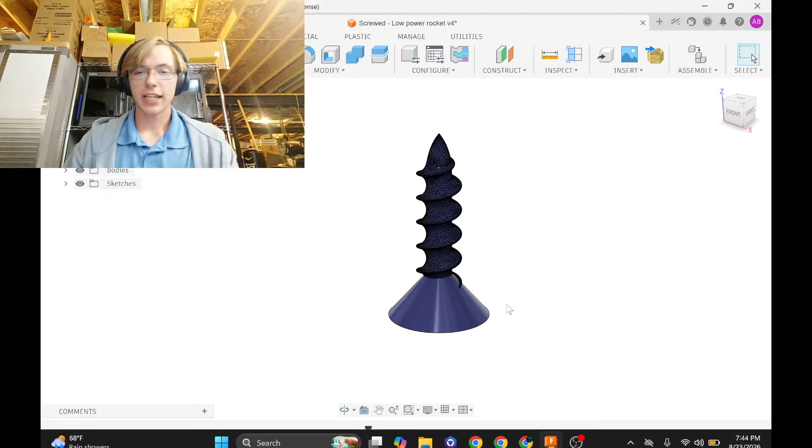But yeah, so today we're going to be working on this. It's a screw. I don't know if you can tell that or not, but basically I got the idea: what if we just take a model of a Phillips head screw, scale it up and make it out of TPU, which, if you don't know what TPU is, I don't have any right next...

Oh, I do. So this is a dice that I 3D printed out of TPU filament. And so it's squishy, right? TPU is a very squishy filament, so you can make flexible things out of it. And that's cool for rockets because if it smashes into the ground, it'll just flex and deform but then spring back like a spring. So it won't damage the rocket at all, and it won't damage what it hits. So you could fly it on concrete and it would most likely be fine. I would obviously have to test it, but most likely it would be fine.

Turn off this so there's no fire. But yeah, so it would work great.

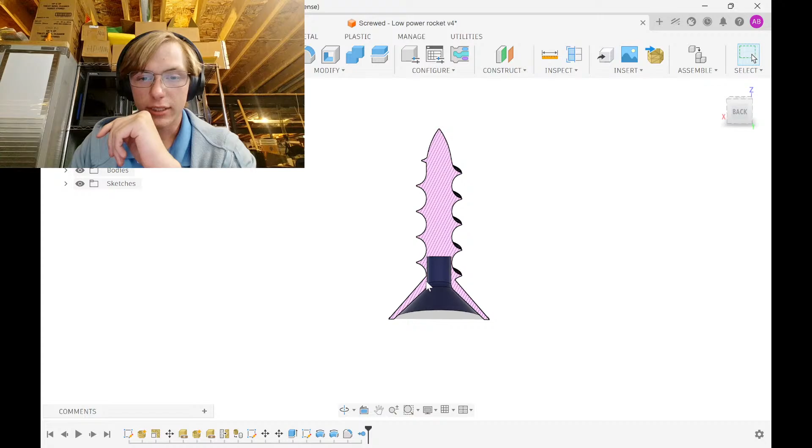That said, we have to design it, and there's a few constraints and issues with this. I was originally thinking to do a cluster of 4 motors. A Phillips head screw has, oh, you can't see that. Hold on. A Phillips head screw has here, here, here, and here. So if you put a motor in each end of that, you can have a 4-motor cluster. Unfortunately, because of the chamfer, there's not enough space for a motor. So I'm just putting one motor down the center. And even still, there's not a ton of room because I decided to go with one 24mm motor.

And basically, this is all I have right now. I've got the screw model itself. And then I modeled this geometry as best I could in OpenRocket and figured out what size flange we need to make it stable. So I did that, and then I've started on this. Essentially, it's going to be motor eject, meaning when it goes up, instead of the nose cone coming off, it's going to eject the motor out the back, and then a streamer will come out there.

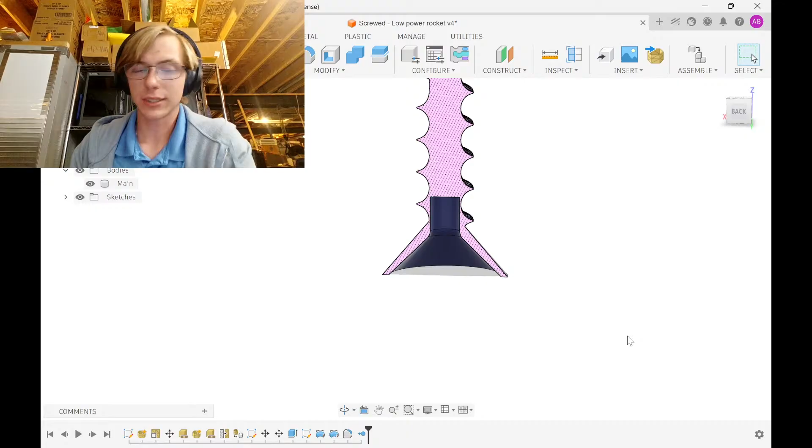The only reason I need it to eject at all is because I don't want it to come in ballistic, because if it's stable going up, it'll be stable coming down, right? So I have to make it so it doesn't come in ballistic and literally screw itself into the ground, because these spirals will make it spin so fast. In fact, I'm worried about it ripping itself apart from centrifugal force. We will have to see, but definitely it will be an interesting rocket, to say the least.

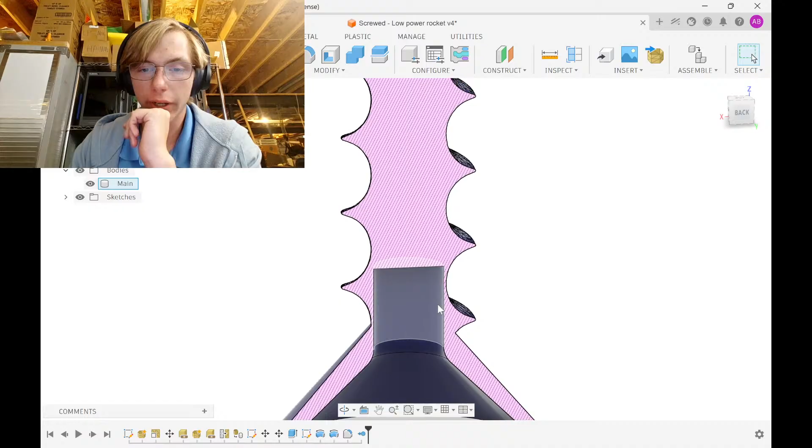But yeah, so we are going to make a screw rocket, if that makes any sense. So what I'm going to do next is I need to figure out if this, because this is about a 1.2 millimeter tolerance, which is 3 layers on a 0.4 millimeter nozzle, which is pretty strong, but I don't know if that'll be strong enough. So I need to make the housing for the motor itself, and then we can move from there.

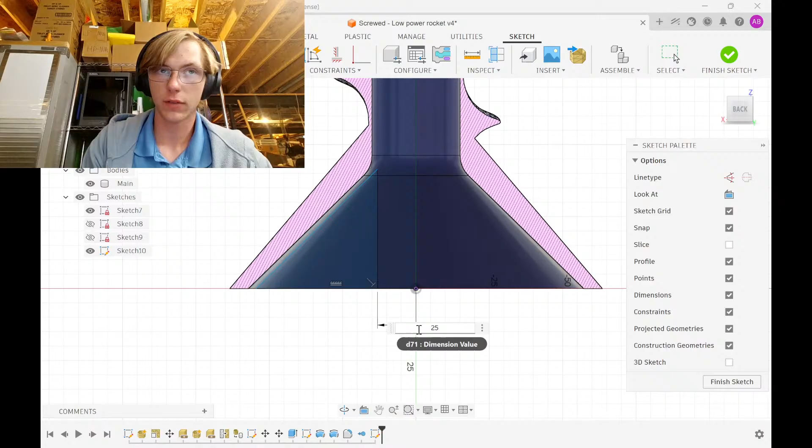The only thing I don't know, because I could make a new sketch right here. Turn this sketch on, and then we do line here, here, here. Then the inside diameter of a 24 millimeter, or the outside diameter of a BT50. 24.8 millimeters, so to add tolerance, we'll do 25 mil. Oh, but it's revolved, which means we need half of that for the radius, which is 12.5.

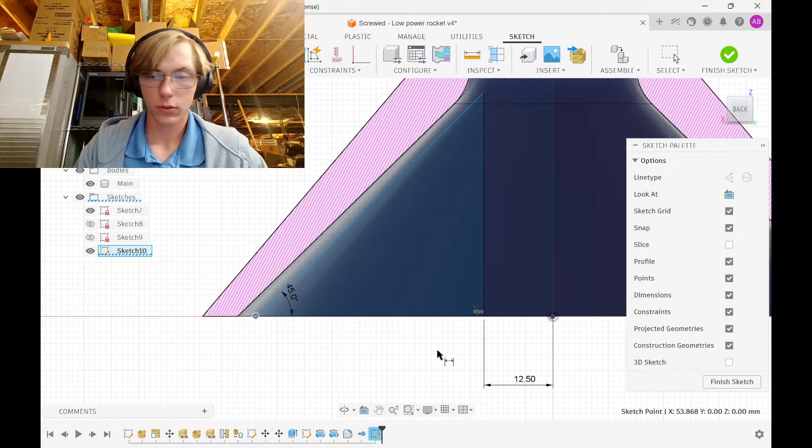And then we want this overall radius, this number to be 45 degrees, and then the total width of it should be 2.25 inch. So that's the total width of that. So inspect from this corner to this corner. Inspect here to here. We got 57.15 millimeters. 57.15 millimeters. Perfect.

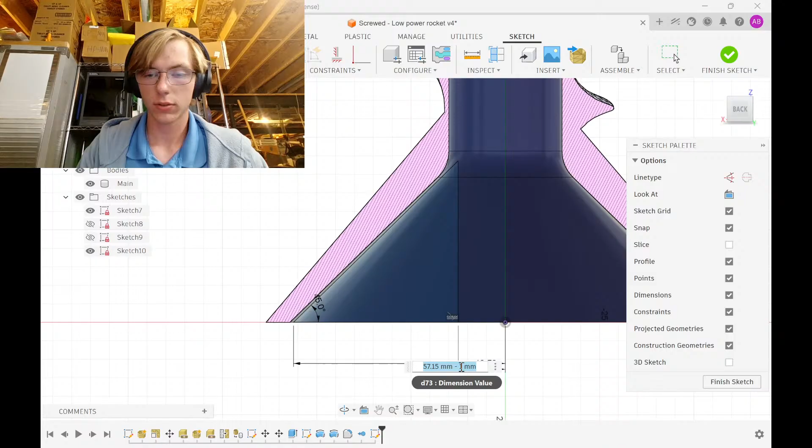Now we want to subtract probably 1 mil, so that there's a little bit of a tolerance gap there. We don't need that much though, actually. Actually no. We'll do 0.5, and then we do need it to have a bit of a collar. That way it actually stays in there in flight. So we will go line. Actually, what am I doing? I can just use the old sketch, revolve it around this axis, create a new body, hide the main body, fillet this to be 5, I believe it was. No, it was 10. Yeah, it was 10.

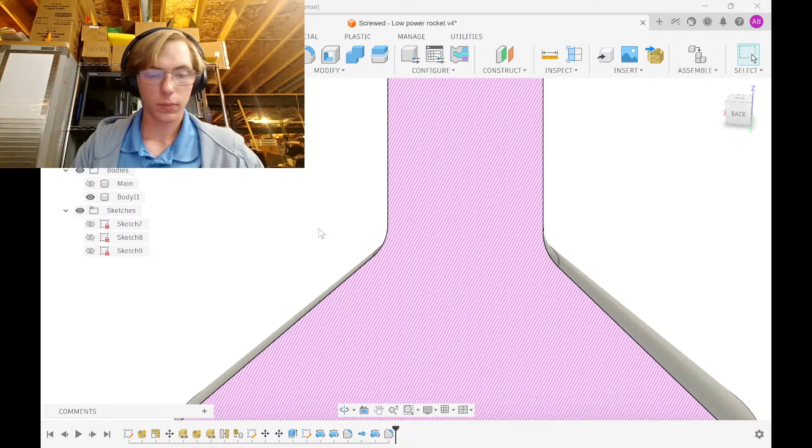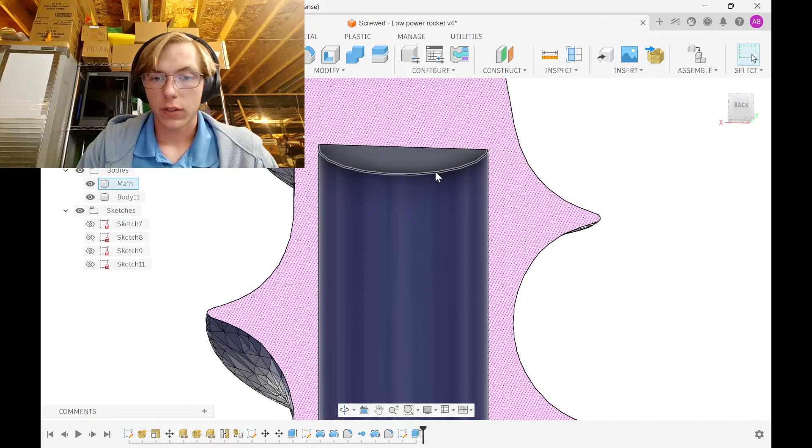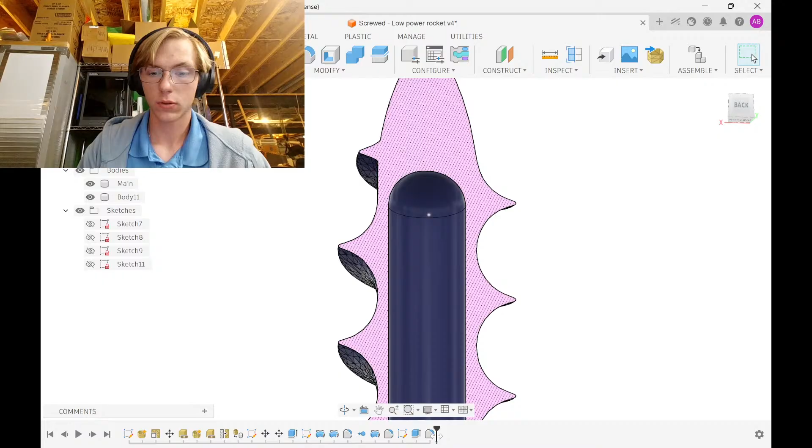Alright. And here, circle sketch. Dimension this to be 25. And then we will extrude this down. In fact, we will do symmetric. Yeah, symmetric is fine. Turn back on the main body. Okay. We are definitely going to want to fillet this a ton. It's like 10, 12, 12 millimeters it is. Fillet this again by 10. Or not. That's fine. I know what we can do. And for this to, and then fillet this to be another 10.

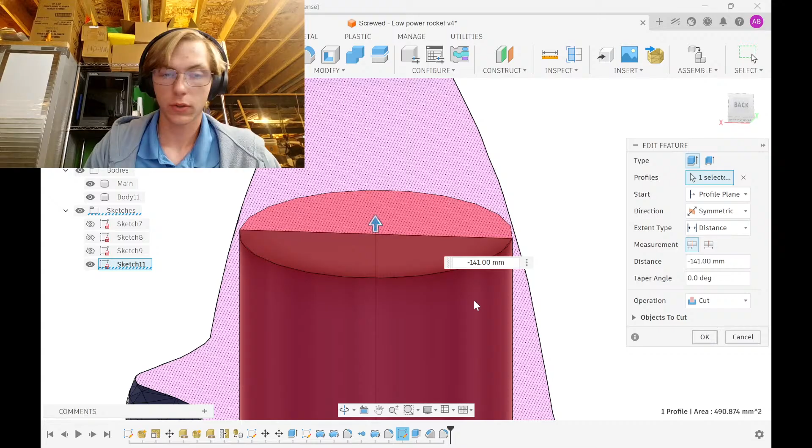46. Shoot. It has to be 40. Okay. But we want it to be a little bit higher up in there. So it's gonna go 4. Should be about good. There we go. Now there's, yeah, that's about good. See, that's good. Now we have our motor mount and our main.

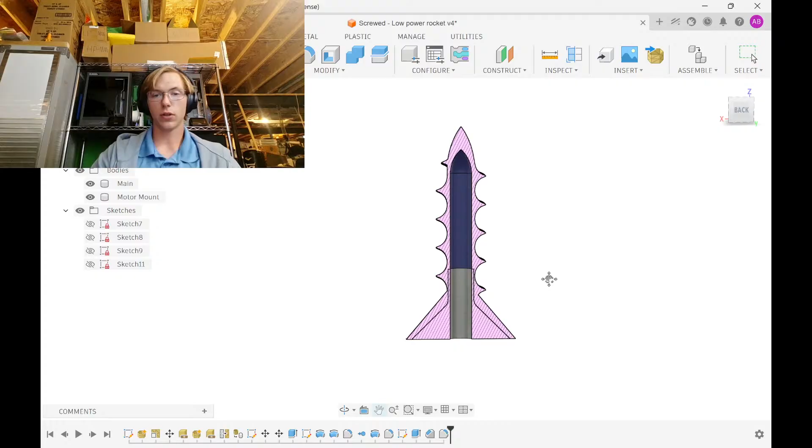So in flight, after we have motor ejection, this will pop out, and then the streamer will come out of right here. I just have to figure out where the attachment points are, because we still need a way to attach this piece to the main piece. I don't know how that can be done. We could do it like the traditional low power way, where you just take the folded piece of paper and you put it up in here, and then find a spot to put it on here. The only issue with that is we need tolerance for the cord. I don't know. I'll think about that.

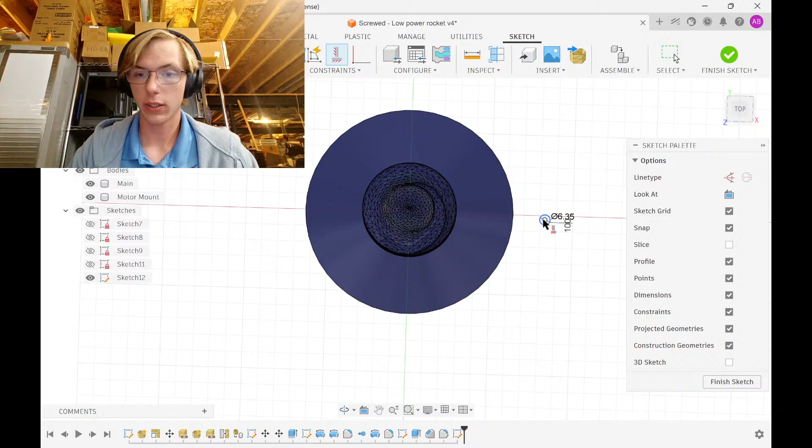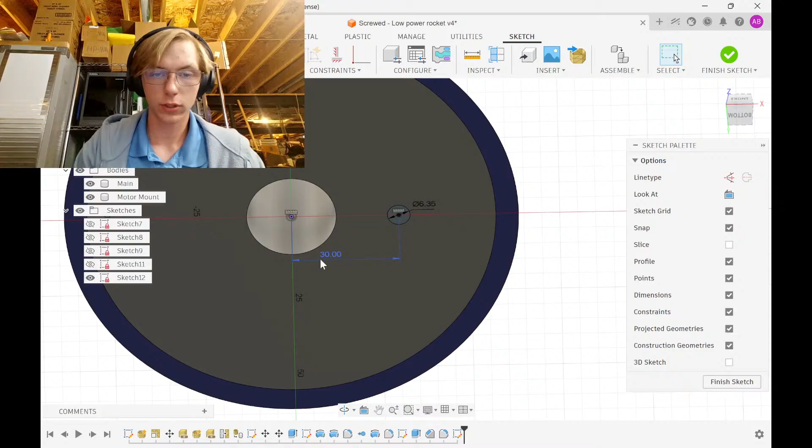One thing I do know we still need is a spot for the, what's the English? I can't speak words. The launch rod. That's 0.25 inches. Make it in line with, and 80 millimeters. No, why would it be 80? No, we need more like 20 millimeters. There we go. Potentially. I think that's gonna be too close. We'll try 30 and then go there. And this is gonna be like the most stable thing ever. But this is just gonna go straight up through all of it.

Okay, that is definitely way too much. So I do need to move it closer. We'll try 20 again. That's too close. I don't know. Let's see. Okay, that's about right, but it needs to be on the other side.

Give me 1 second, guys. I gotta apply this real quick. Did my airplane mode get turned on my phone? What? That is very interesting.

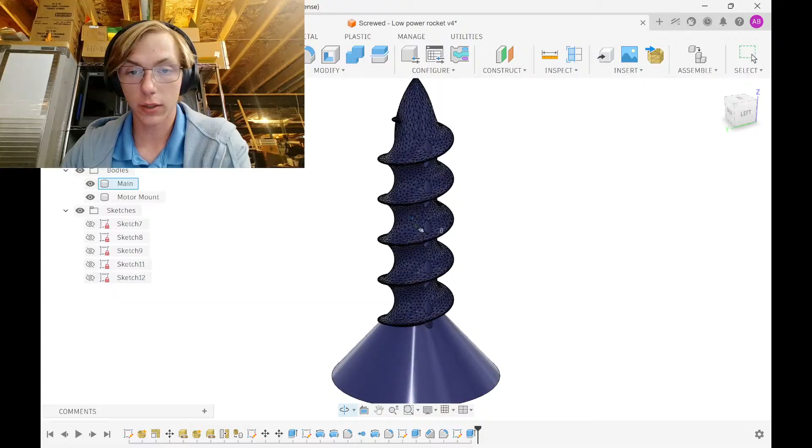Okay, great. So what I'm doing right now is we're working on the screw rocket. For anyone that just tuned in, working on the screw rocket. I'm adding the hole for the... I cannot English. It's the guide rod, guide, not the guide rail. I cannot think right now apparently. But it's the thing that the rocket goes on top of that guides it. It's the guide rail, guide rod. I don't know why those words don't sound right, but they probably are, so I'm gonna go with it.

Yeah. I don't know how well the friction will do because there's essentially one really long hole right here, plus 1, 2, 3, 4, 5 more holes, which will make it super stable, but hopefully there's not too much friction there. If there is, I guess I can just move it out some so it's only in the cone, but I don't know how well that would go.

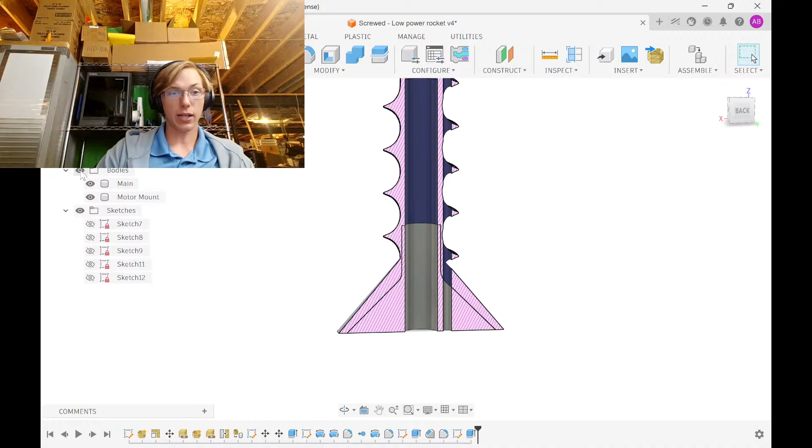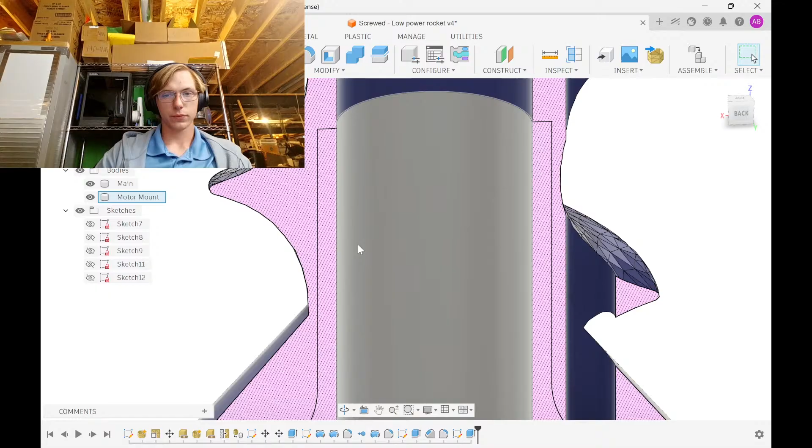Okay. So now we gotta go back to the issue of connecting these two because, again, at apogee, when the motor ejection charge fires, this will go. Motor will knock this part out, so then the streamer will come out of right here. But I need a way to connect this section to this section. And the reason I don't know where to put it is I can't really attach it any good places. Okay, that's not bad. Okay, so on my, oh, not that. Open it on my Mini Zenith Express. Once it opens, I can show you.

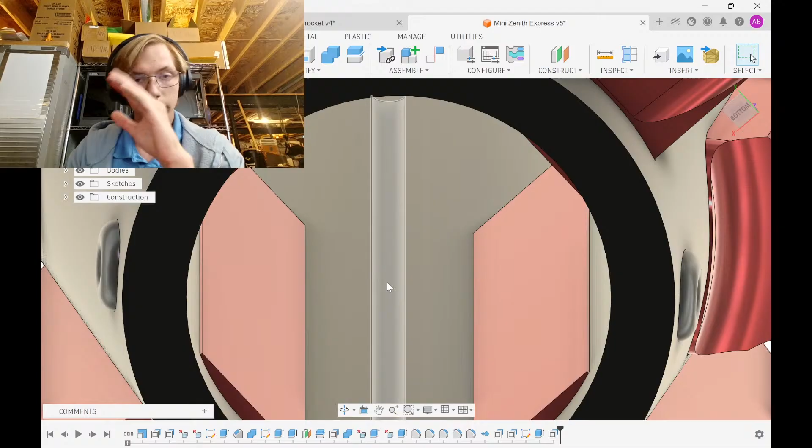In Mini Zenith Express, this is all one piece, right? So on the normal ones, there's a connector right here that you can tie the shock cord to when you're building it, but on this one, there's not, right? So I had to make a new way for it to attach, and so I added this little, where is it? Right here. I added this groove right here that you glue. So you glue the shock cord in between the motor mount tube and the outside of this. So that would fix that. Definitely. So that's what I'll do here.

The only other issue is then how do we attach it to the rocket itself, right? Because I could theoretically do the whole thing like that Estes started, where you take your piece of paper and you fold it up into a trifold, and then you glue that into it. But I don't know how well that will hold against the TPU, and I don't know how well it'll hold against multiple repeated flights. And we want something that will last, right? So,

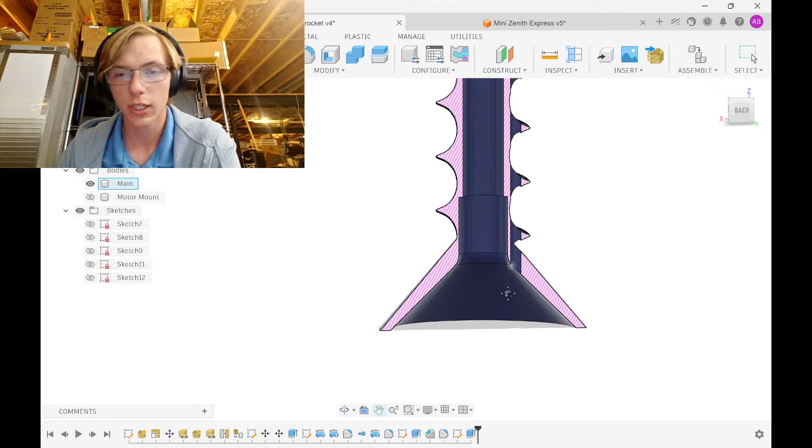my other thought was I could tie it somehow to this, like make another groove in here and then have it do that. But I think that's just going to add complications. So I think doing this as simple as possible is the best way. And I think we'll try the trifold square, see how long it holds up. But ideally that'll work. So we gotta add the groove, and this groove is essentially a diameter of 1.5 and about probably 0.6 indented.

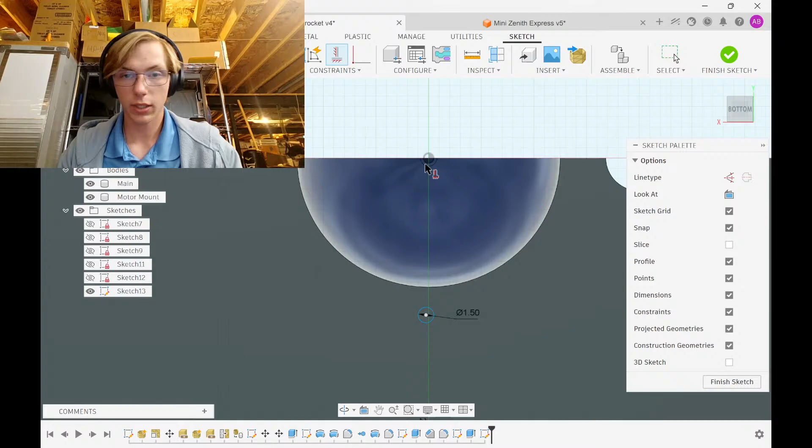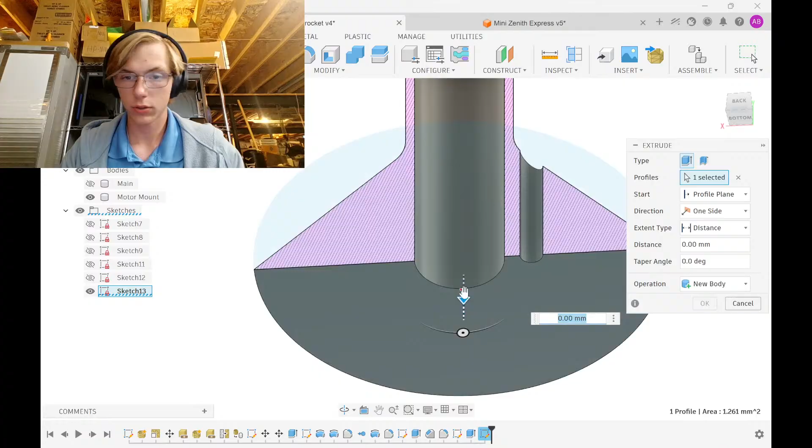So here we're gonna go make a circle that has a diameter of 1.5 millimeters, and then put it in line with the center, and then .75. 12.75. That's probably about good. Turn off the main extrude. Okay. And then I'm going to be using the... That seems really small. Maybe it's not. I can't tell. I think it just looks small because this is such a small diameter. And this is also an 18 millimeter motor mount. This is a 24, so that plays a difference too. But yeah, so that'll be that, and then go back to the main, and I think that'll probably work.

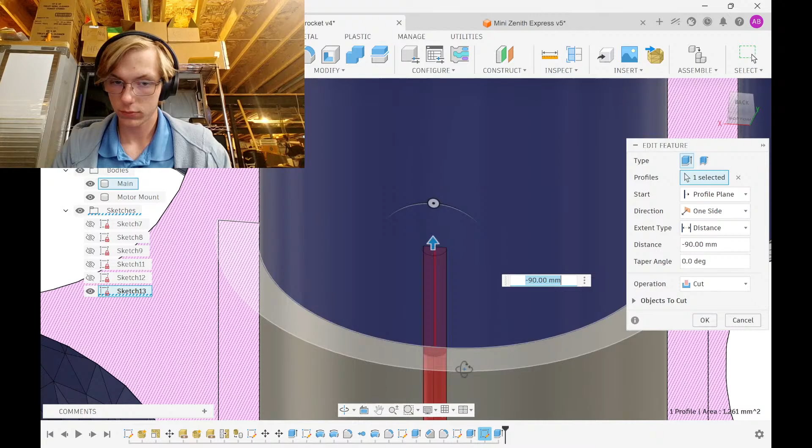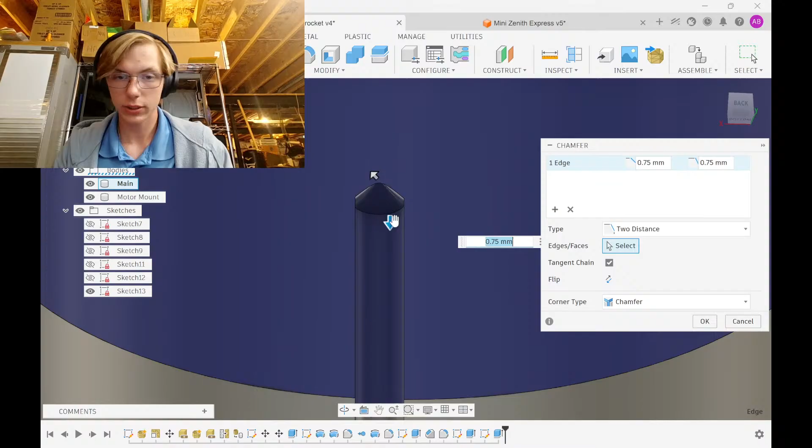Going to keep this on, then give it a few millimeters. I want it. There we go. I don't know why it wasn't working the first time, but if we just chamfer this by 0.75, that should be the right number. And then we do two distances and extend it down this way. Then it adds a nice transition into the thing. Or it should at least. Oh, never mind, it made a cone.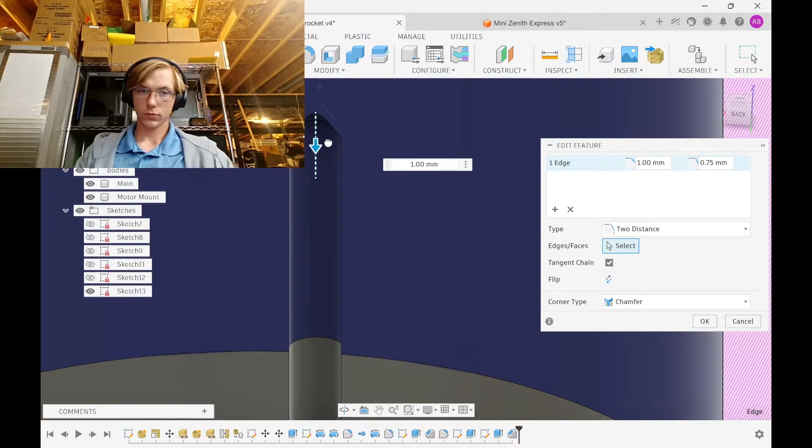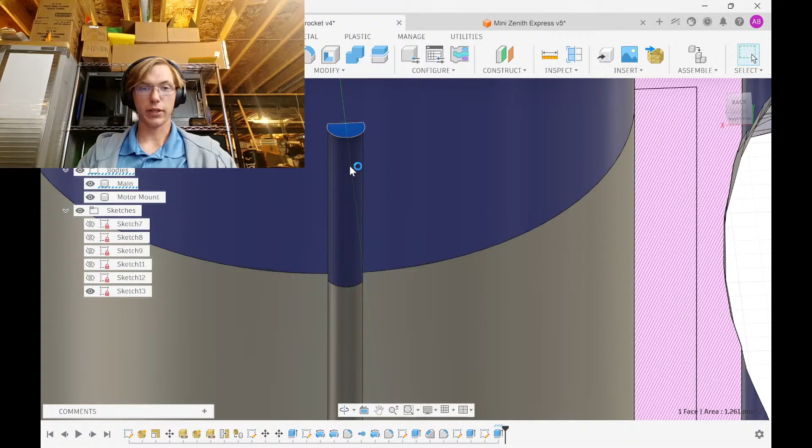Wish I could just only do the second half of it. But alas, I cannot. What I can do, however, is make another circle here. A circle of the same diameter. And then add a line here. Make it a box. Constrain these vertical. This to this by 1 millimeter and dimension them apart by 1.5 mil, and then you just turn off both of those. Bada bing, boom.

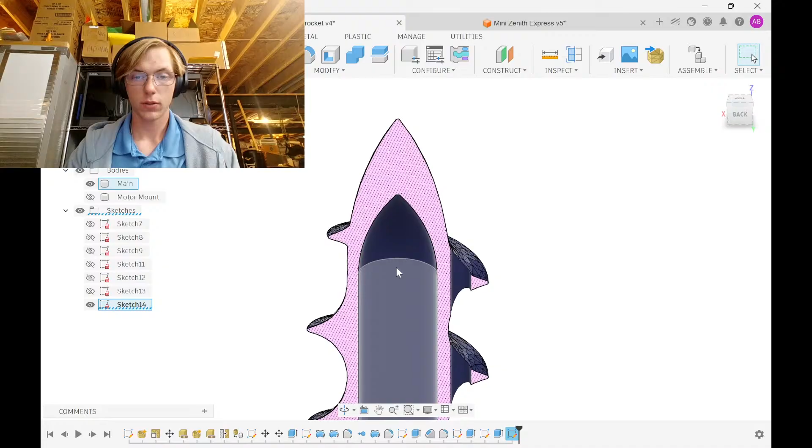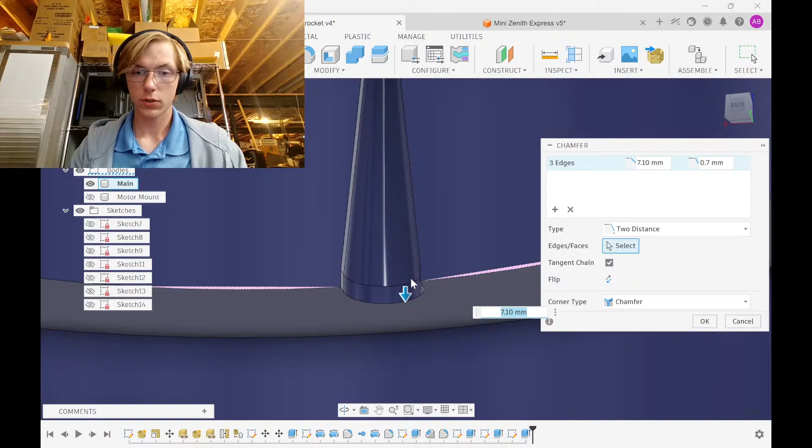And when you turn back on the main, you can extrude this down, making it a straight corridor. And you've got your straight and your flat, and then you just do chamfer for this now. Ideally, I think I did this right. Okay. Put that back to two distances. Screwed it down most of the way. 7 millimeters to be specific. Okay. That'll print perfect.

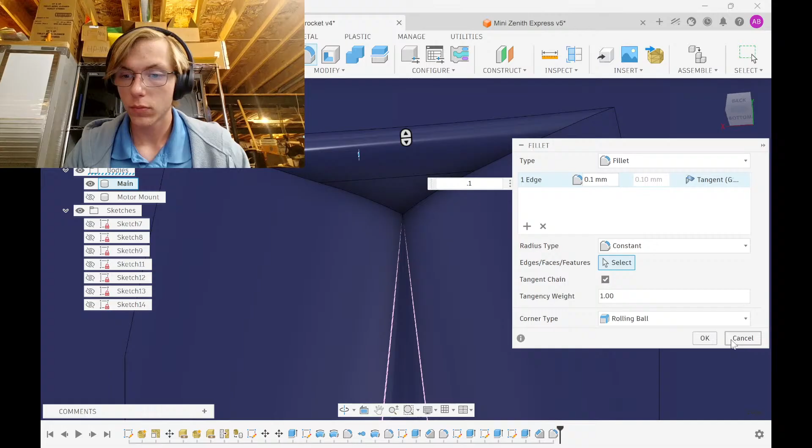And I'm going to just chamfer these, fillet these by 1 to open it up nice and large. I won't be zooming anymore. Okay. Also throw a fillet on here, 1 millimeter, 0.2. I think if we move that, then we can fillet it this way. There we go. Yes, nice.

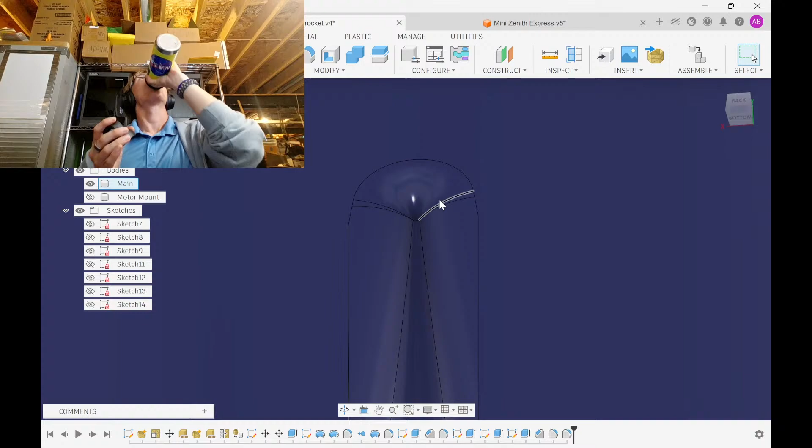All right. Perfect. So that is that. If you're just tuning in, this is essentially a giant screw rocket. It's basically a screw that's been made into a giant rocket. Well, it won't be that giant. This is scaled right now to be 10 inches tall. If this is popular, I could definitely make a larger one because I have a bigger printer, so I could make one all the way up to 20 inches tall, I think, or maybe a little more.

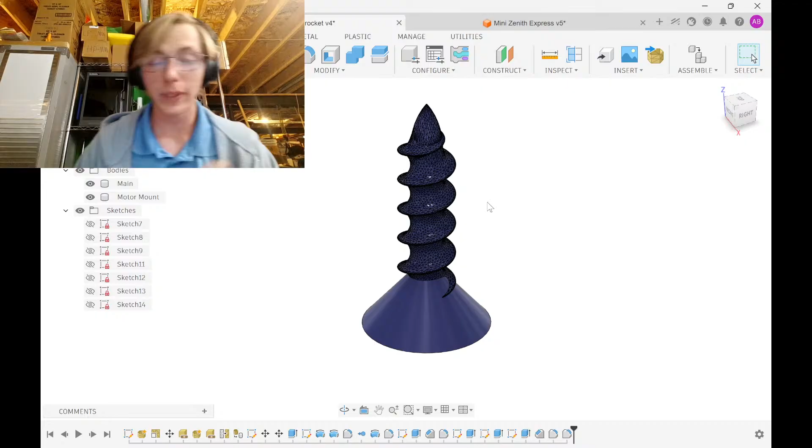But it's going to be made out of TPU, which is basically just a flexible filament. I have this dice made out of TPU, so you can squish it, and basically you can fly it on concrete without it smashing into 20,000 pieces, which should be very useful. Also, it's a cool rocket. It'll spin like crazy, so I'm very worried that it'll rip itself apart with centrifugal force, but we will have to see.

Yeah, so I also did sims in OpenRocket, and this flange is the right size. I sized it so that it should fly stably, and the spinning will help stabilize it even if it doesn't. If this isn't enough to stabilize it, and if the spinning over-stabilizes it, then we're just cooked because it'll implode, essentially. I think that's almost good.

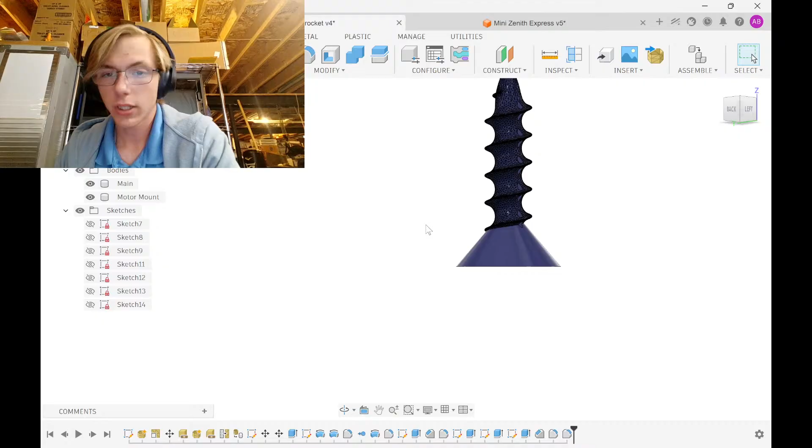Let's see, what else does a rocket need? It's got rear motor eject, which is another thing I have never played around with before, so this will be the first time trying that. But basically, it'll fly up, and then when it gets to apogee, it'll turn over. Then the motor will fire its ejection charge, which will blow this apart, and then there will be a shock cord connecting in here to in here, so then a streamer will come out of right here, and the streamer will stop it from coming in ballistic on its way down.

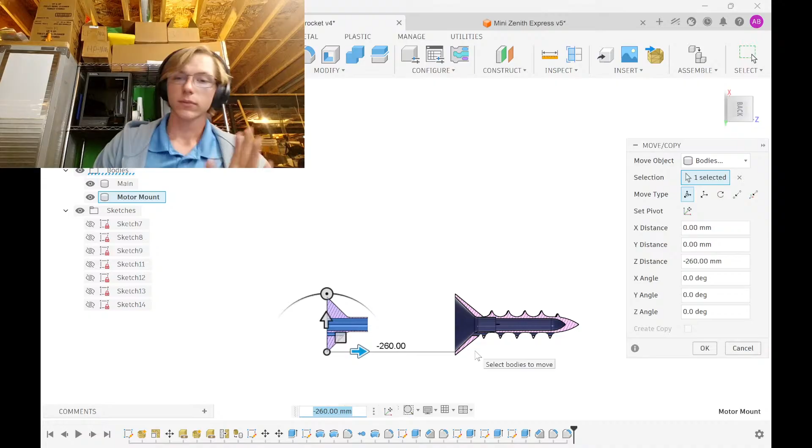The only reason this streamer is there is not to help soften the blow at all. It's literally only to stop the rocket from becoming ballistic. So I'm hoping between the streamer and this not being inside the rocket anymore, it'll be not stable when it comes down, but I don't know. We'll see. Shock cord will be connected here. Shock cord will be connected here. The motor tube will go here. This is the guide rail slot.

Honestly, I think that's probably about it that we need to do. I'm going to export this model and we'll go throw it in Elegoo slicer to slice it up. See how it goes. Alright, product files. I gotta make sure I don't show you guys anything. I don't want to leak anything.

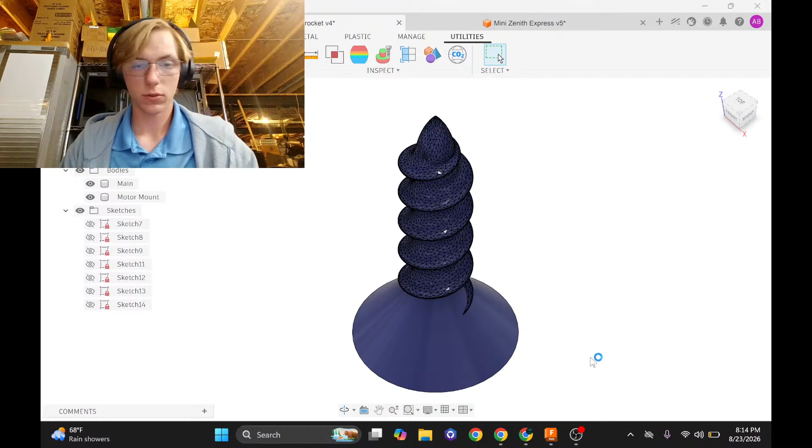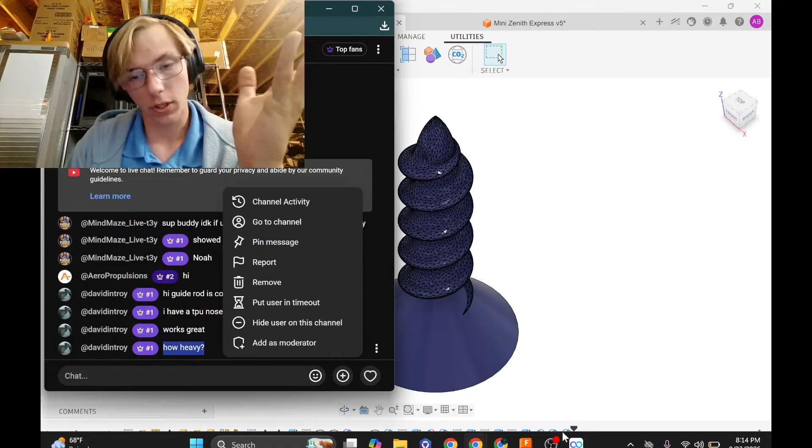But yeah, Elegoo. Nice. When I sliced it before, it was I think 180 grams, but that was before I added the bottom piece, and that was before I took out the center. So it should hopefully still be around there, but oh, I forgot to plug it back in. Hold on. Okay. Forgot to plug the computer back in when I brought it back downstairs.

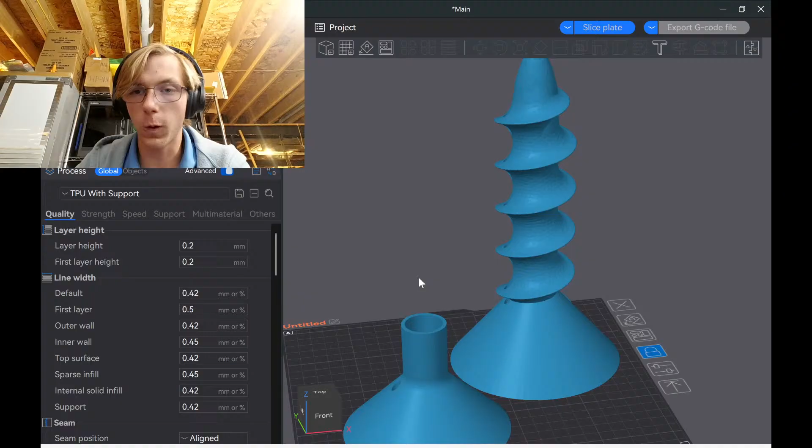But we will see. So control import. We want documents, product files, printed kits, screwed, both pieces, TPU with support. Actually don't. I want to try printing it with no support and see how that goes. I don't think it'll go smoothly, but hopefully it does. I would like to find a way to make this smoother because of the way the model was handled, it has all these triangles, which are annoying. I'm going to try to smooth them out. That said, this is just testing.

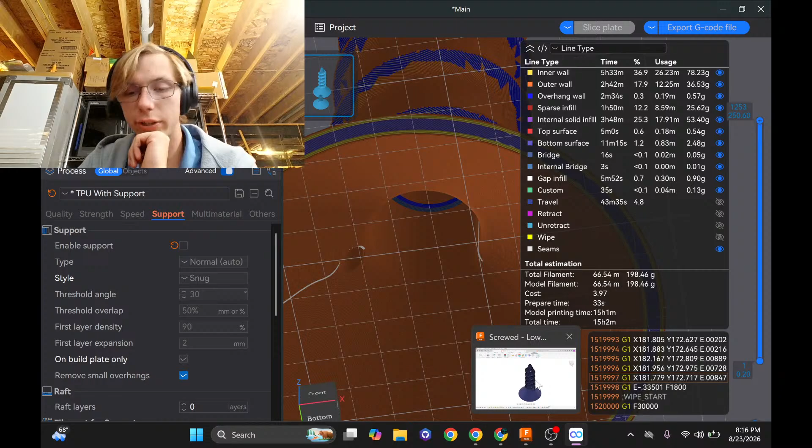So TPU with support. Take the support. I don't even know if we need support, honestly. And it's TPU. I feel like no support is best. We definitely will need to change this lip right here. There's a lip right here, and I need to get rid of that, so there's not a giant overhang there. That would be bad. Solid. Chamfer. There's no reason to have extra overhangs. Chamfer. Two distances.

.5. Yeah, let's go send this up to 7-ish. That deletes the entire thing I did. Okay, well. That's fine. So in that case, we don't even need any of this nonsense. We don't need that. Don't need that. Don't need that.

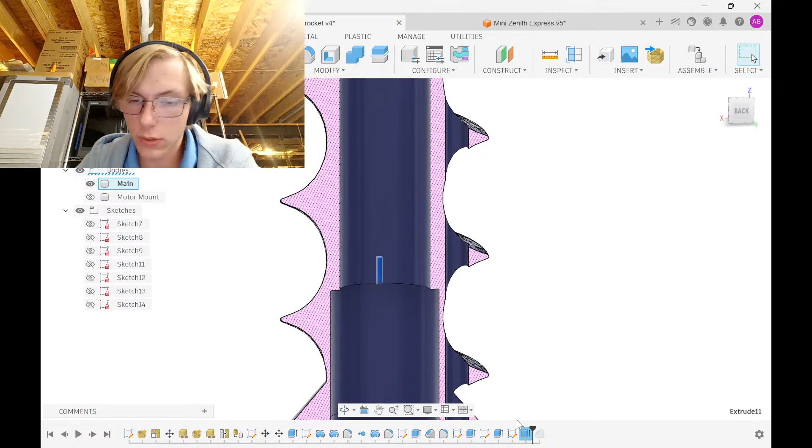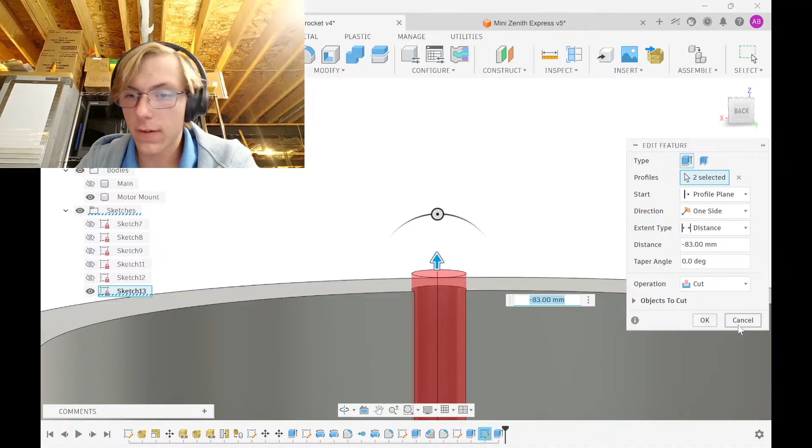I think we still need that because that includes... Oh, never mind, we don't need that. Don't need that. I only need it to go to right there. Back on the main. I do this one. Chamfer it at 0.5. This at 15. That'll also reduce the weight a tiny bit more.

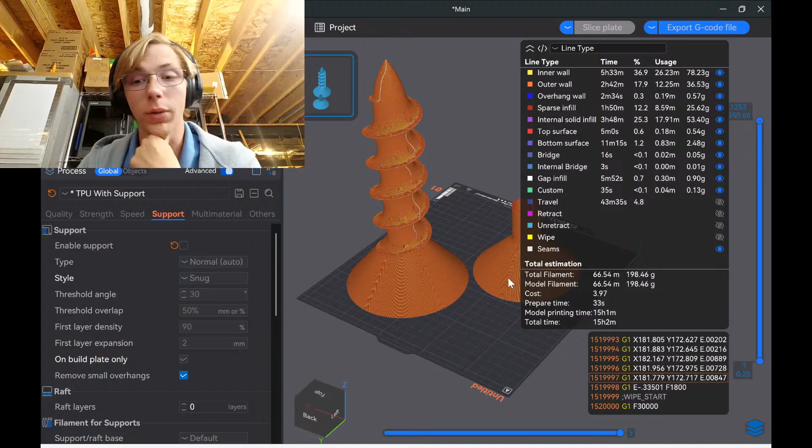That said, we're looking at 15 hours to print, not bad. And then the total filament is only 198 grams. That's actually really good for a D motor, because this will fly on an Estes D12, probably a D12.5, I think. About. That's a really good weight for a D12. I think you could actually put an adapter in this and end up flying it on a C6, probably, depending on how it ends up flying. But yeah, that'll be really good.

And that's not even with changing. That's 3 walls and 5% infill. Should be gyroid, yeah. I find gyroid works best for TPU because it squishes evenly. Yeah, I think this will print really well. I think we could honestly make the insert plate out of hard plastic, out of PETG, and that would work better. Make this out of TPU and this out of PETG. Or I could try printing them both out of TPU. I can't speak. Yeah.

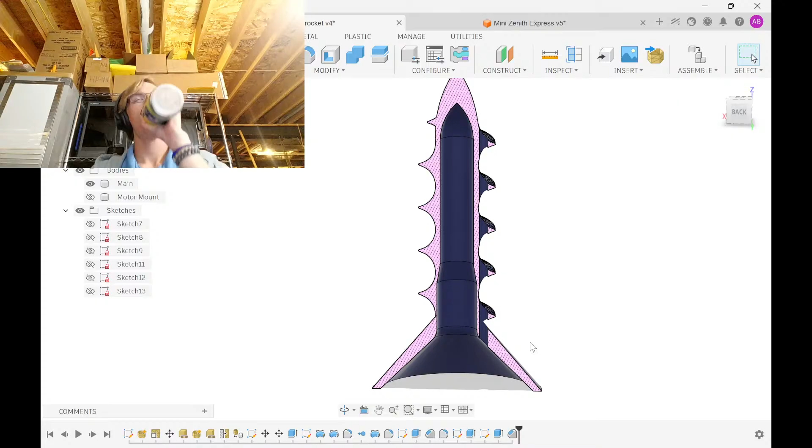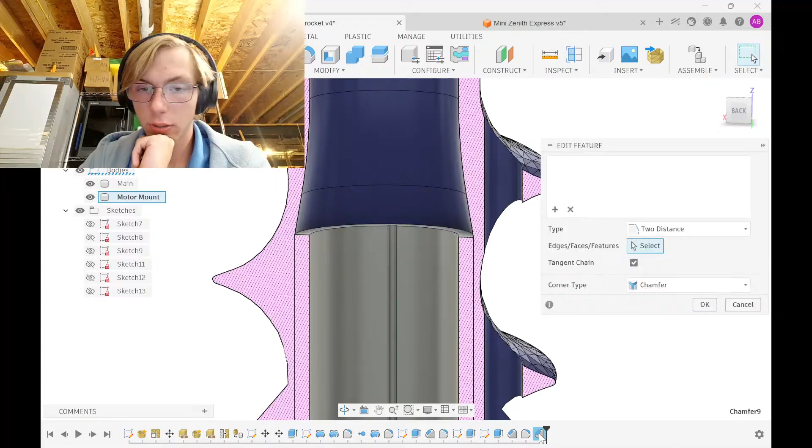Also going to fillet this by 20. I meant 100. I don't know why filleting on an outside edge like this, the numbers are so weird. It's like a quarter of what it actually is, but yeah. And then I can't do this one because that's where this goes. But, yeah. I am going to chamfer this just because it will help with the inserting process. We'll do a chamfer of 2 millimeters on that. Equal distance. 2 mil.

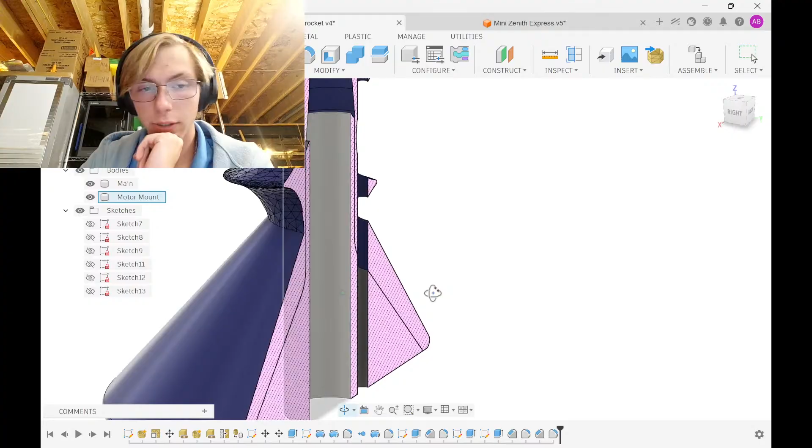And then I already know we're going to want a fillet on this of at least like 5 mil. Never mind, 5 is way too much. Let's try 2 mil. That's better. And then don't actually need to do a fillet here because it's such a mess. See, there's no tools for smoothing, right? Yeah, I'd have to put it back into a mesh, and then, although, just do this. So this becomes a mesh without me crashing my computer. Hopefully, I don't crash the computer.

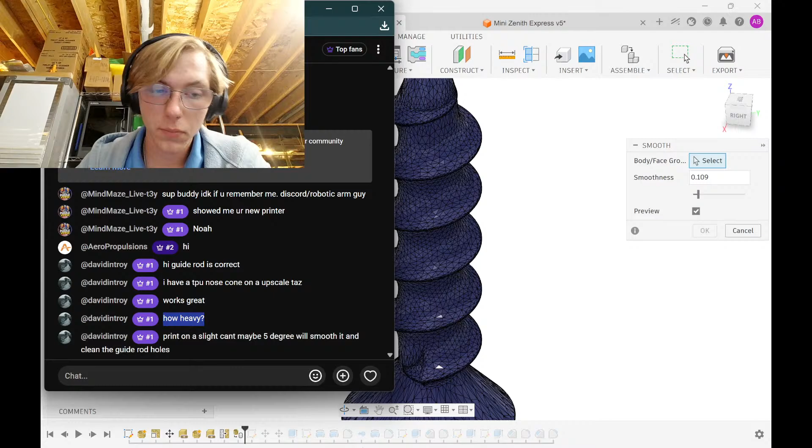And then we tell it to smooth it slightly. Smoothness, we want. Let's try that. Oh, I have to select it before I crash the computer. Guys, still there. Oh no, I didn't crash Fusion. Okay. This. Oh, was this before? Oh, I had already. Wait, what? Convert mesh. Oh. That's after I turned it into a thing. Okay. So.

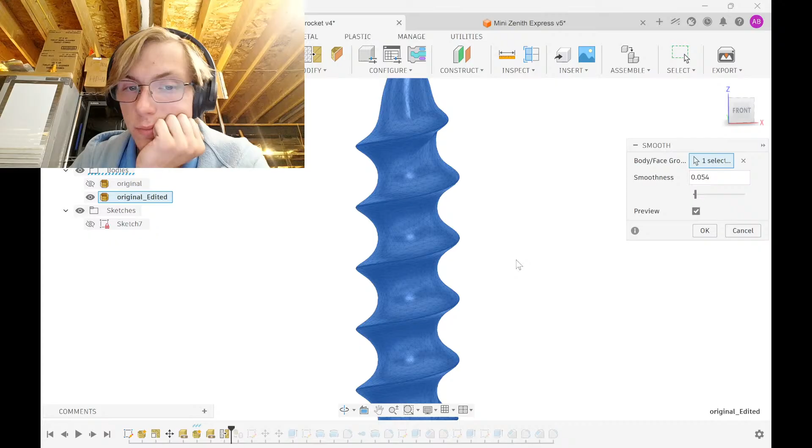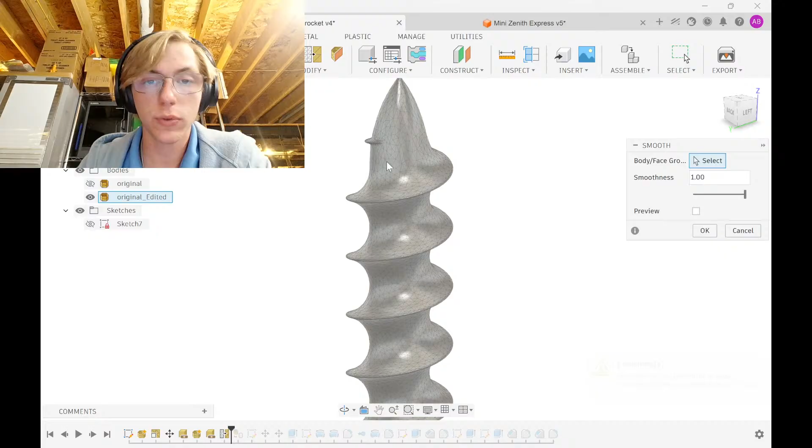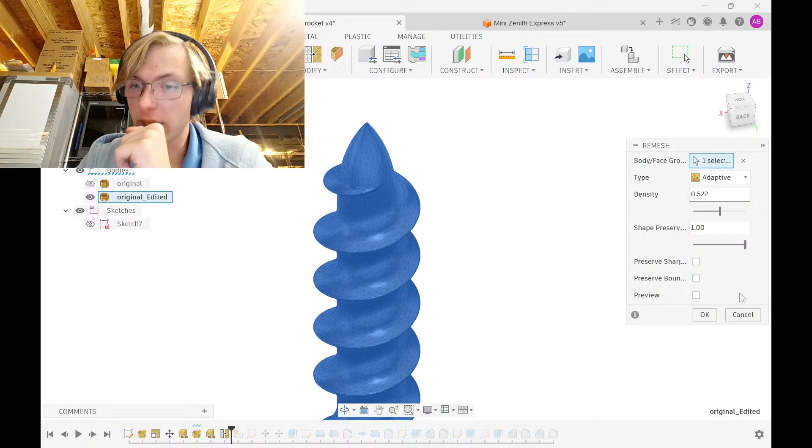No, 0.01. Smoothing doesn't really work. We can remesh it though. We remesh this. Adaptive, but a higher density. With maximum shape preservation. Nope, that made it worse. Okay, well, I guess we'll just leave it and see how well it prints. I'm printing something right now, so unfortunately I can't now. That said, it would have taken 15 hours anyways.

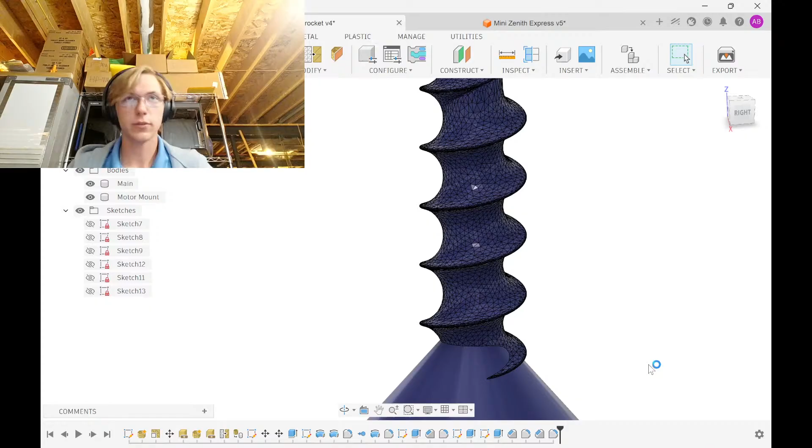So I guess I was planning to stream till 9. This is the shortest stream I've ever done in my life, I think. That said, okay, so that's done. I will hopefully get this printed out and hopefully take it. David, when I come to see you, I'll hopefully bring it, and then we might be able to fly it sometime while I'm there. Maybe even at E-Rockets, I'm not sure. If you're still watching. If I get it printed out in time.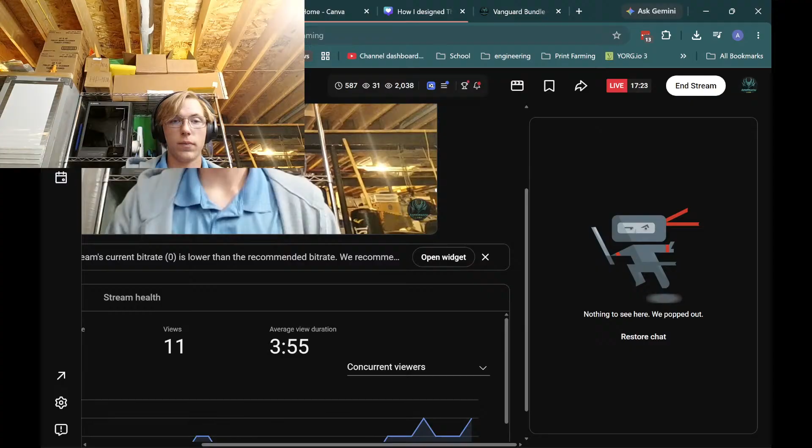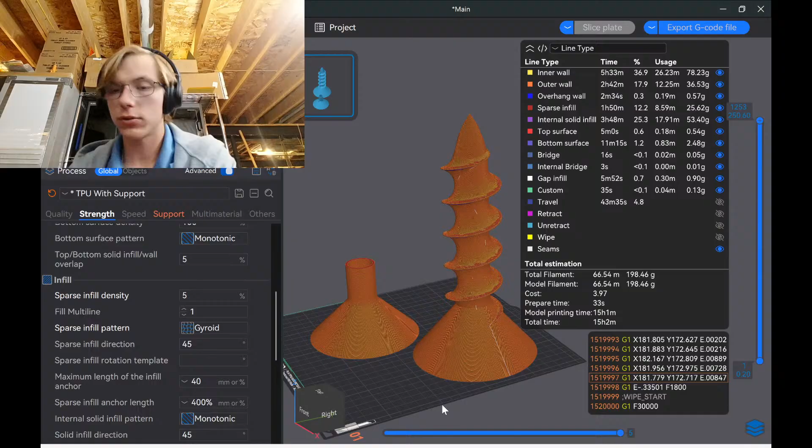Yeah. So I think I'm done designing this rocket for today. It should be pretty well done. Yeah, it should work out to be just under 200 grams total, minus obviously the streamer and the shock cord, which is going to be 300-pound Kevlar, and then also the motor tube and the motor itself, right? But that's wet weight, not dry weight. So yeah, dry weight at launch should be probably 210, which is, I believe, under the recommended number for Estes D12 liftoff max weight.

226 grams. Perfect. Just under the maximum liftoff weight of the D12-7, which means if we got a D12-5, we can go all the way up to 283. Okay, perfect. So we're right in the wheelhouse of the D's. Maybe even the C, because they did just come out with the C. Well, not, it was like 7 years ago, but the C11 also would fly on this. I don't know how well.

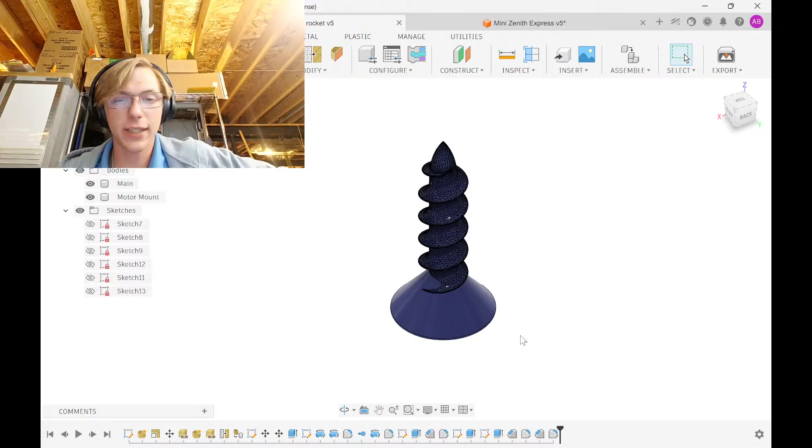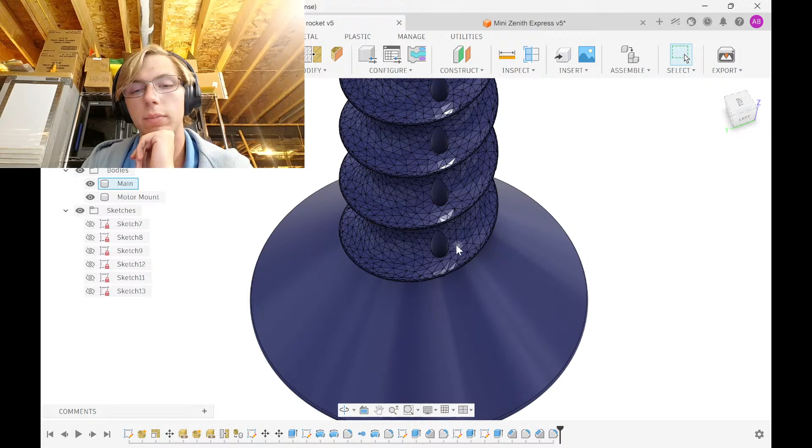But yeah, so this rocket's done. I think I'm gonna get it printed out over the next day, and then should have it with me testing in the next few days. So yeah.

Now the rest of the time depends on what you guys think we should do. I will answer any questions you guys have, as well as we can just chat, or I can start working on another project. I don't know what other projects I actually have to work on. I have so many ideas, but I don't necessarily want to start a whole nother one tonight. I worked on a pixelated rocket a while back. I could take some input on. It needs to be redesigned, but

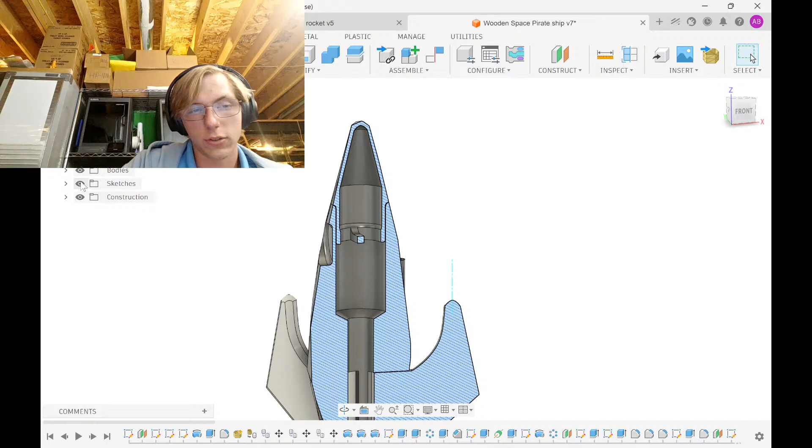let's see. So this one's Wooden Space Pirate Ship. That's what it's called. It's got like a crack in the hull and a mouth and some eyes, which are cannons, and then obviously the fins. The only issue is it's not anywhere even close to remotely stable. This was a headache to design, and I'm not sure where to go with it next because it's just too small and too fat to be reliably stable, I'm pretty sure, unless I make the fins huge. So pretty goofy though.

And then let's see what other rockets I have that I've been working on. I think I have some out here by accident. Never mind. So something else. Ah, yes, R-23. I've been working on getting this rocket done. I've tested it so many times. It's called R-23. It's supposed to be like a stealth bomber with ring fins. It does not fly stably. I need to make the fins themselves a whole lot bigger and chunkier. I need to figure out how to make it stable because I do really like this rocket.

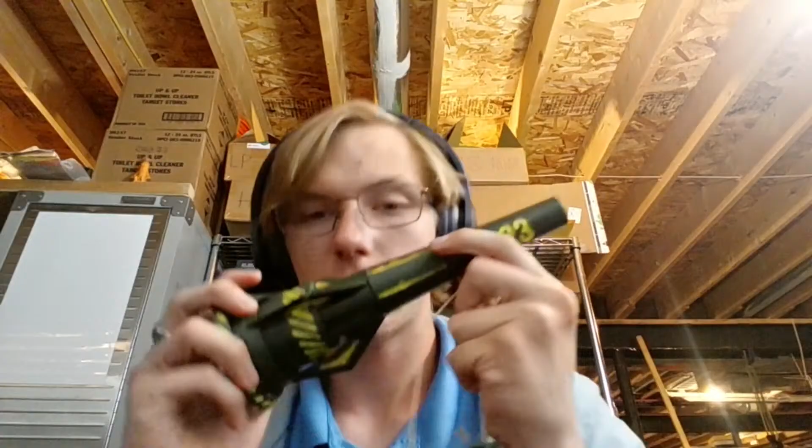I actually have one of it right here. Don't pay attention to the terrible painting job, but this is what it looks like in real life, and it's about this big. It's supposed to be around $30, which is pretty good. Really cool concept, I'd say. And it looks really cool, but it's not stable, and I need to get it stable. Its first flight had no nose weight, but then after I think Mark III, I added about 15 grams of nose weight, and since then I've added probably 30 or maybe 50 grams of nose weight, but I haven't flown it again. It's a really heavy model, so you have to fly it on Quest engines, which is less than ideal, but yeah.

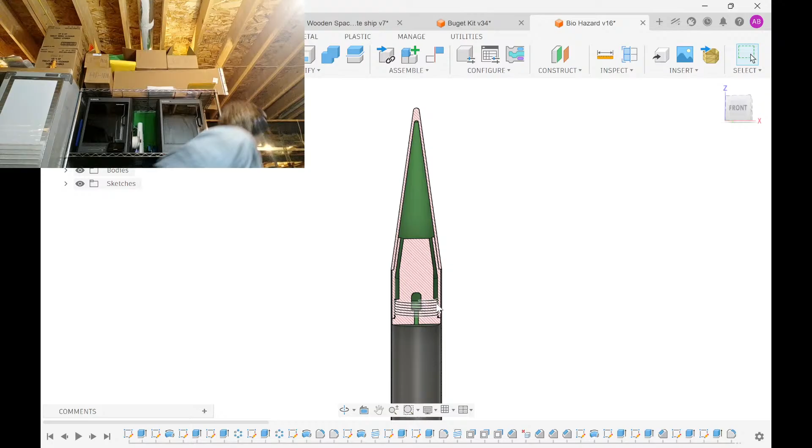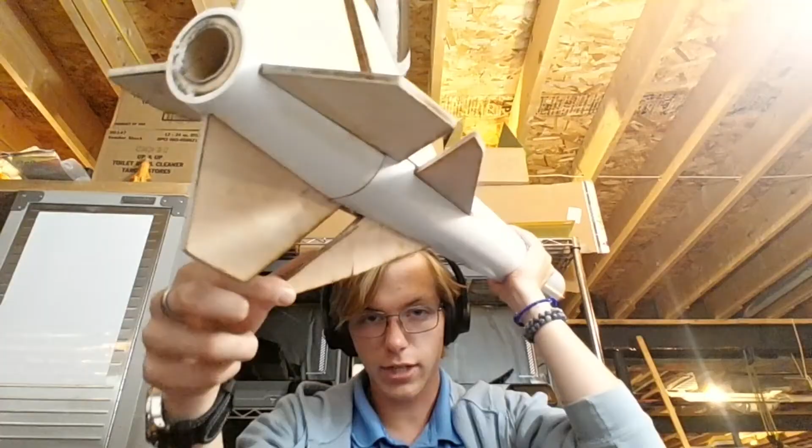This is a rocket that I've been working on for a hot minute. This is a high-powered rocket design called the Biohazard. It'll have a radioactive sticker, 3D printed raised text for the name, and then the radioactive symbol. It's got split fins, a tail cone, a 29mm motor mount, and a fancy conical nose. I have this mocked up right here. I think I broke this one. Yeah, traveling back from LDRS, this fin got cracked, so I need to fix that before I can actually finish it and fly it.

But the cool thing about this is I've been developing the nose cone avionics, similar to what I believe Lab Rat Rocketry, Inverted Pursuit Labs has, so it comes with a dedicated avionics bay, which is really cool for a rocket this size. The design intent behind it was for this to be a really cool build project for level 1 and level 2. And then let's see what else.

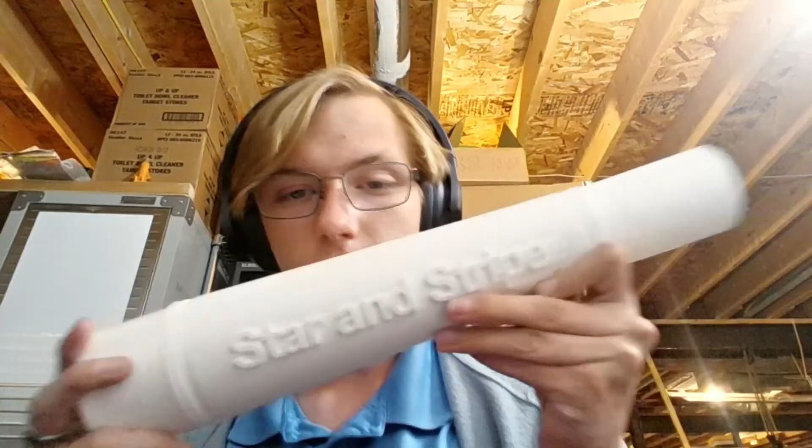This one, this is such a cool rocket, David. If you're still watching the stream, you'd really like this rocket. It's named Stars and Stripes. It is a red, white, and blue rocket. It's got star cutouts on the fins. Aero Dragon Labs 250th anniversary, that's raised text. That's actually right here. Oh, can't even see it. My bad. But right here it says Stars and Stripes on the transition from the 3-inch booster to the 54 millimeter, I believe, main section. That's pretty cool, at least I'd say. I haven't got that one done.

This is a cluster, so it's got 3 engines in it. The concept behind that is you have a Redline engine, a Blue Thunder engine, and a White Lightning engine. So you have red, white, and blue flames, which would be super cool as well. All 29 millimeter engines.

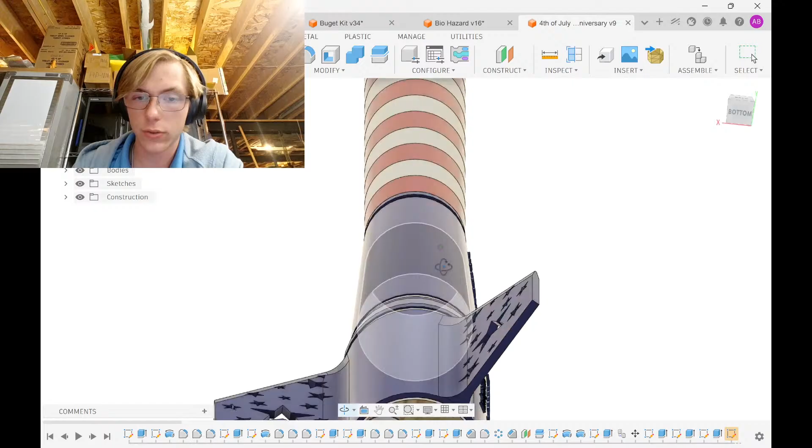And then that's all known rockets that are posted. One rocket that doesn't seem to be very popular with anyone is my Skyforge rocket. I would have thought that you guys would love Skyforge just because of the aesthetic, but you guys don't appear to love it. I haven't sold a single Skyforge at all ever, which is crazy because it's such a cool kit.

It's a 3-inch kit where the name is raised text. It's got a whole copper piping. The nose cone is like a cage almost, kind of. It's got laser cut fins. It's got a tail cone with rivets and all kinds of cool details. And then these are all fully 3D printed copper pipes.

I'm not sure if it's the price that people don't like, because that is kind of pricey, but it's less pricey than my other really expensive rocket kit, the Ultra Zenith, which I've sold a ton of. So I don't know why people don't really like Skyforge very much. I know it was one of my favorites.

It was such a headache to build, dude. Oh my goodness. Skyforge, I went through like 20 iterations to get those pipes to print properly, look good, and just not be a pain in the butt to assemble. So that rocket took me forever.

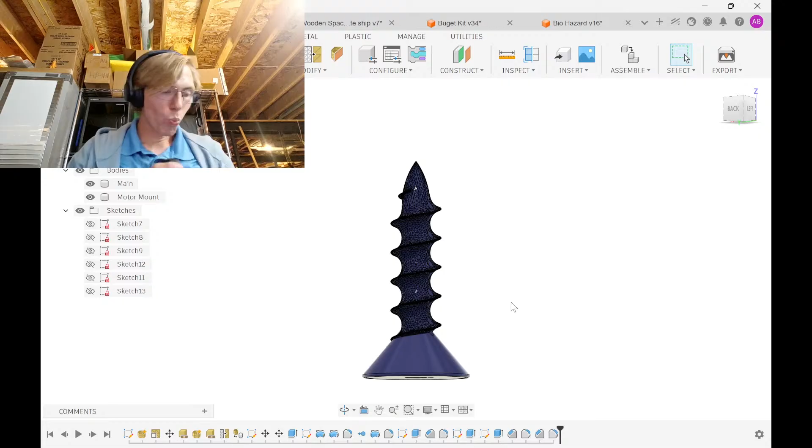I am done designing the screwed rocket, which I need a name for, guys. So if you think of a better name than Screwed for the rocket that is a screw, then definitely send it in the chat. I definitely need help with thinking of that name. If I don't get any other ideas, I'm sure I'll come up with something eventually, but I also like naming things after what my fans say, and taking inspiration from other people's ideas.

I try as hard as I can not to copy anyone because I want everything I make to be as unique as possible. If any of you have ever been to my website, you'll notice that pretty much everything I make is very unique. The only thing I've ever really copied has been the Stealth, which I actually reached out to Art Applewhite about and asked if I could manufacture his kits for him, since he hasn't been able to for a long time. That's how I started being able to sell the Stealth.

I actually have the Cinco and the Delta of his in the works as well. Two other saucers. The Cinco is like a 5-sided pyramid, actually it's more of a saucer than a pyramid, I guess. And then the Delta is a full-on pyramid or a full-on saucer.

I'm working on a collaboration with the Rocketeer to get some of his cooler kits printed. He has a really cool spinning one that he made that's just an odd rock that I want to sell. So lots of cool stuff in the works.